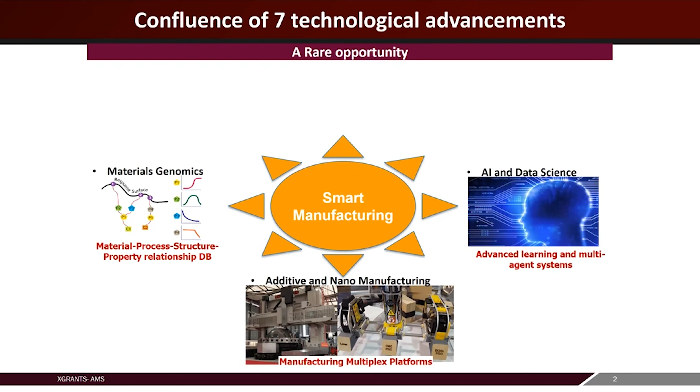All these things happen through advancements in what people in the general public call AI, and we refer to as data science, looking at advanced learning technologies as well as emerging into what we call prescriptive analytics. In addition, there have been significant advances in measurement technologies, both in terms of sensors and communications, and also advances in computing—advanced cloud, edge, and other architectures—as well as the use of clean energy to make manufacturing not only efficient and productive, but also sustainable.

So this is a rare opportunity where all these advancements we are seeing in various different fields can be brought in to advance the way we make things. That's pretty much how I see smart manufacturing.

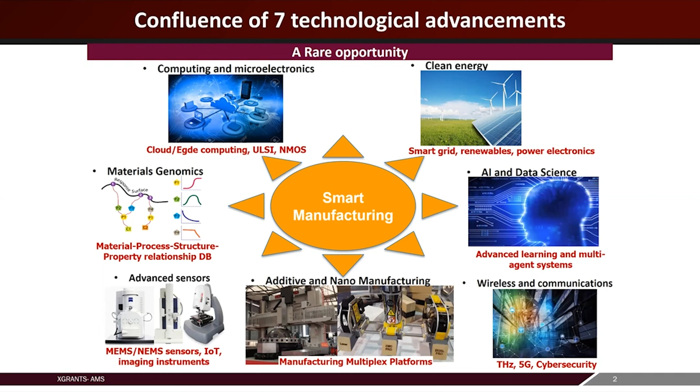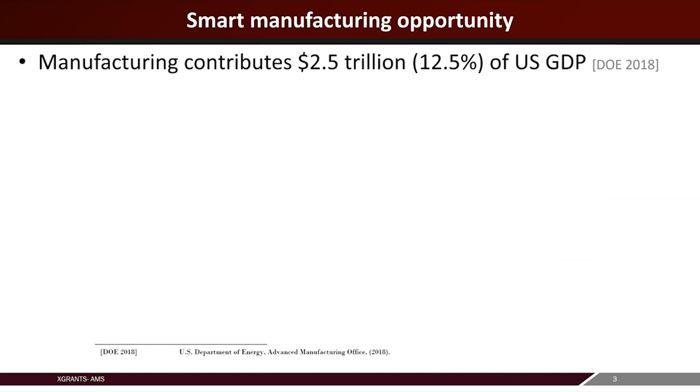But in this context, there are some important points I would like to lay out to our group. The first is it's extremely important to look into this, and I hope this presentation helps us look into this problem in much more depth, and raises interest in this problem among our community. It contributes a significant portion of our US GDP, and lots of these industrial groups are becoming part of the smart manufacturing effort.

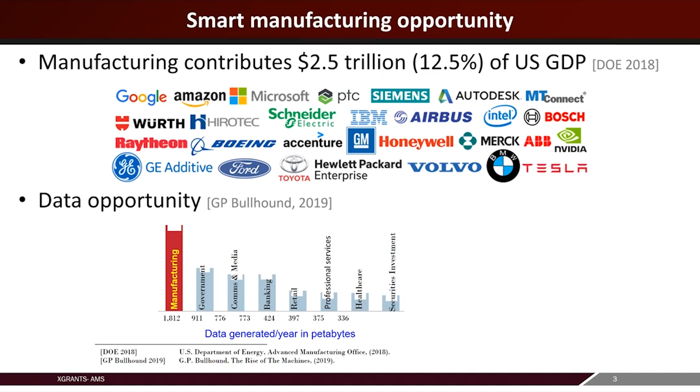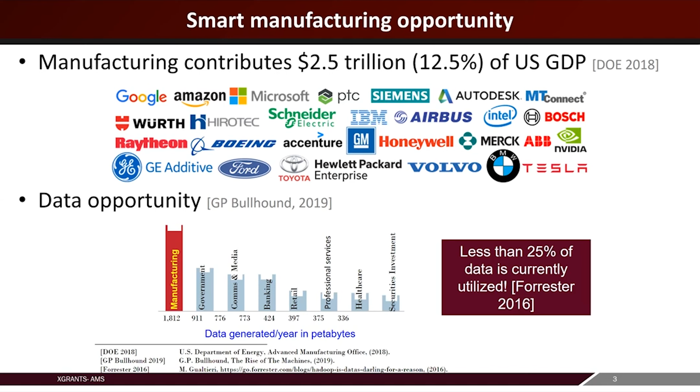Second, and more important, from a data science standpoint, the amount of data generated in manufacturing exceeds the data generated in any other field. So if someone wants to study data science approaches, manufacturing would be a very fertile field. There are certain interesting challenges in that very little of the data generated in this manufacturing industry is currently utilized. So there is an opportunity to harness this information in many different ways.

These include the way we actually design and make smart products. What I have put on the screen are three different emerging products. The first is morphing wings on aircraft. This is not a dream anymore. In fact, using shape memory alloys, we can create some of the materials needed to create this morphing behavior.

Second is a 3D printed house. We can create kinds of houses with shapes we cannot possibly even imagine. Some of the advances in the seven things we outlined in the previous slide probably can come in handy as we develop these technologies. The third picture is more at the consumer level.

We can create a multi-material 3D printed single integral part. Essentially we get tested, and the multi-material component gets printed for us at the point of use. This is an interesting possibility that is emerging. Alongside, we are looking at not just designing a component to meet dimensional accuracy, but also to meet the material and microstructure, so we can control the product not just to dimensional tolerances and surface morphology, but also the materials and microstructure.

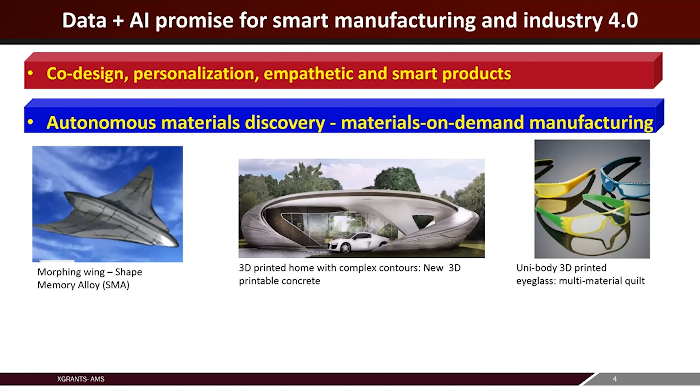These are some emerging ideas that the manufacturing community is looking at, where data science can enhance some of these thrusts. The third is something that the QSR community has looked into for a long time: can we use data science methods with manufacturing process data to self-correct faults, improve asset management, as well as optimize machine parameters to avoid and overcome quality issues.

And people are talking about moving from flexibility to automation to autonomy, so we can create what are called lights-off factories that are much safer and much more reliable than the factories of today. More than in the US, European as well as some Asian countries are working in a big way on this thrust of creating lights-off factories.

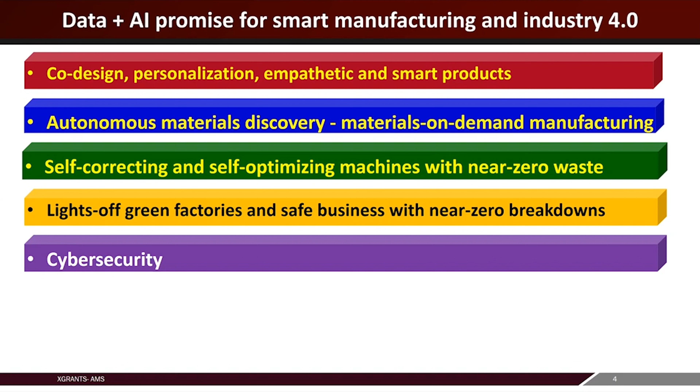Another item that is emerging is cybersecurity. We can use advances in data science to address security vulnerabilities in manufacturing systems. In all these applications, if you look in depth, the foundations are essentially a combination of physical science - manufacturing science - and data science. How can we bring these knowledge components together to address some of these exciting emerging challenges? That, in essence, is the theme emerging from a data science standpoint for smart manufacturing.

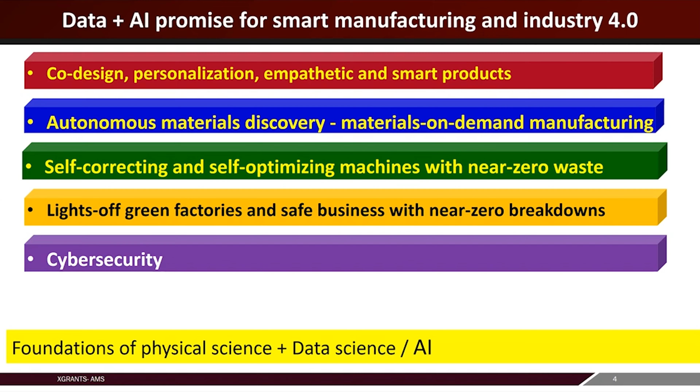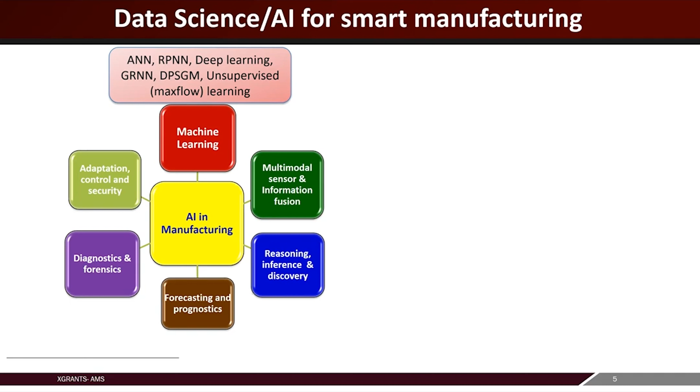When we look at what has been done on data science and AI for smart manufacturing, the first thing that comes to mind is machine learning. There has been a lot of work that our community as well as the manufacturing community has looked at in applying and developing new machine learning techniques to address manufacturing challenges. In essence, what we are trying to do is identify the function that maps certain inputs to certain outputs - that's pretty much what all these deep learning methods do. There has been, in my view, a proliferation of approaches from our community and beyond to address manufacturing related challenges through advancements in machine learning and AI methods.

But that is just one component of where data science can help.

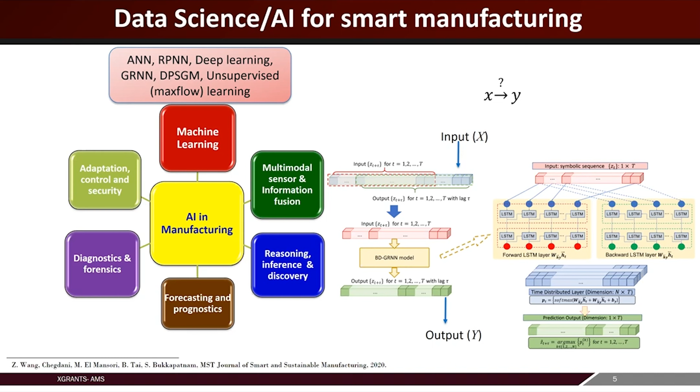There are other techniques needed to fuse information that comes from different kinds of sensors and data sources. One of the key challenges is how we can represent real world information in a form that is tractable for learning and other applications. That is the first challenge from a representation standpoint.

Our community has developed different kinds of methods, especially dimensionality reduction techniques, using optimal wavelets to properly capture and extract features. Graph theoretic approaches have also been done.

Just to lay out a few quick examples from our own experience, what you're seeing here on the screen is a micrograph of a 3D printed surface in as-printed form. We can actually come up with a graph representation of this that can be used to characterize the surface evolution during the post-processing processes employed for finishing these 3D printed components.

You can also keep it simpler. Instead of looking at complex scenarios, you can be looking at time series data. The challenge there is how we can compress this information or reduce the dimensionality so that enriched features can be used for making inferences about the process.

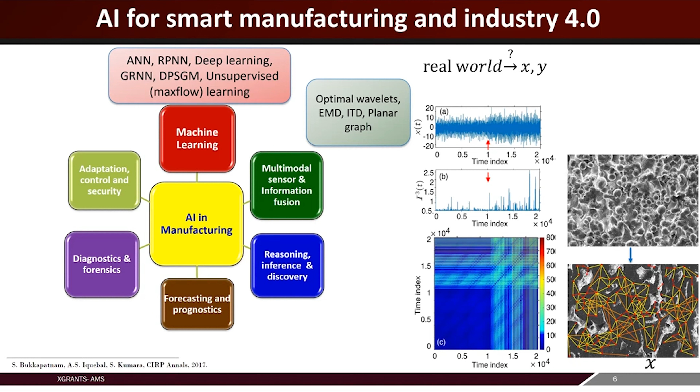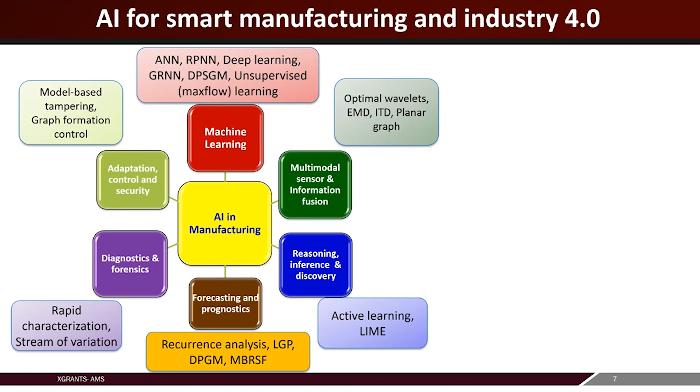Methods have been used for reasoning, using active learning and sequential experimentation techniques. Our community has also looked at forecasting as well as prognostic approaches for manufacturing. Of course, we have at least 30 years of work, especially as a QSR community, in diagnostics and forensics. Recently, there has been a significant thrust in looking at control, security, and adaptation through advanced AI and data science approaches. These are just some facets of what our community has looked at.

Let me talk about what I have been doing in this context. My group has been looking at combining knowledge about manufacturing processes to address quality and productivity issues in both manufacturing processes and systems, especially through the use of data science and AI approaches.

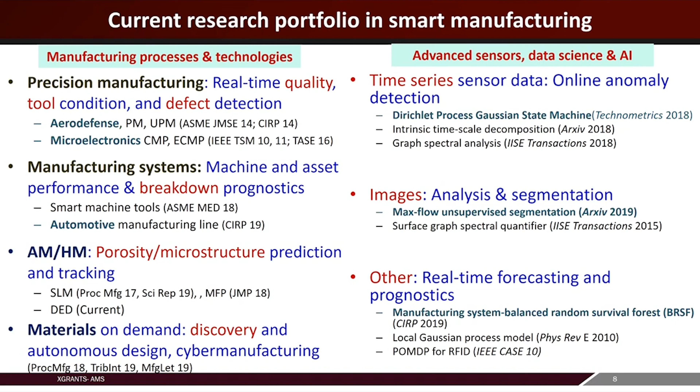In terms of manufacturing domains, we have looked mostly at precision manufacturing and, recently, additive manufacturing as well as material synthesis. In terms of methods, our group has looked at different kinds of time series data, especially combining multi-channel and multimodal data, and more recently images as well as other forms of data, essentially from industrial data loggers. In this talk, I will restrict my presentation to address three different challenges.

The first challenge is encountered at the manufacturing systems level. The second is at what we call the product level, and the third is at the process level. So: system, product, and process.

Thinking about the industrial sectors where each of these problems arises: the first is mostly in high volume automotive manufacturing. The second is mostly in a custom manufacturing environment, where you are creating a very high value product but don't have lots of components to learn from. The third is what we call high-tech industry, essentially dealing with components that demand very high levels of precision and functionality, whether high or low volume.

These are the three different industrial sectors and three different scales from which we can look at this. In the first case, prognostics and asset management in the manufacturing system, I'll present a challenge involving how to fuse information collected across the plant to improve reliability of the entire system. In the second case, I'll look at how we can detect defects in a custom manufacturing environment where you don't have full information about what kind of defects occur a priori. In the third scenario, I'll look at detecting changes at very incipient stages, so we can avoid quality problems, even minute-level ones, that occur in high-tech industry.

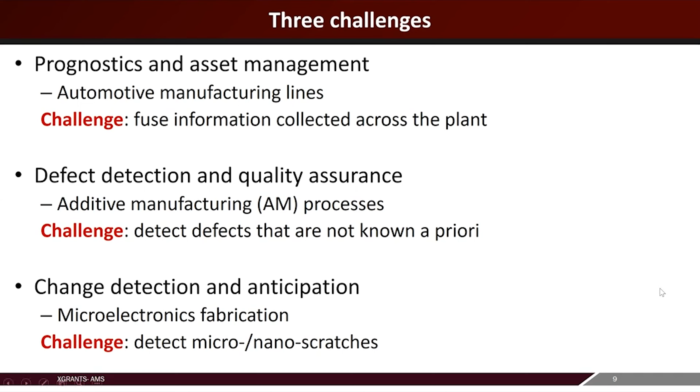To give a quick start, I will talk about the first problem. Many of us have worked in automobile assembly, but to set the stage for describing the problem, I will run the following video. I'll skip some parts so everybody can see this. I hope you can see the video and hear the sound.

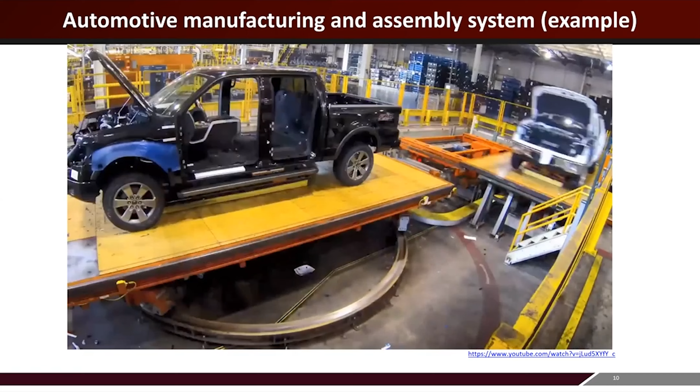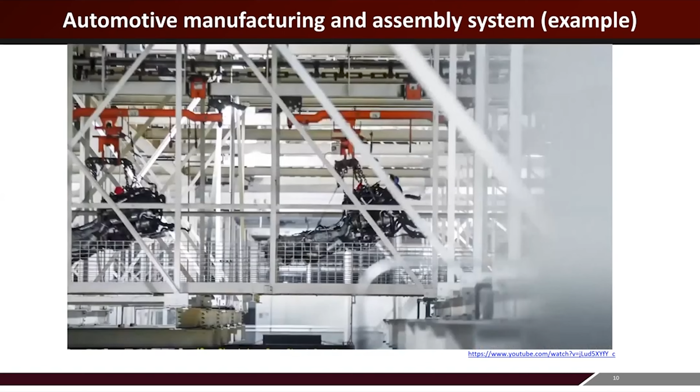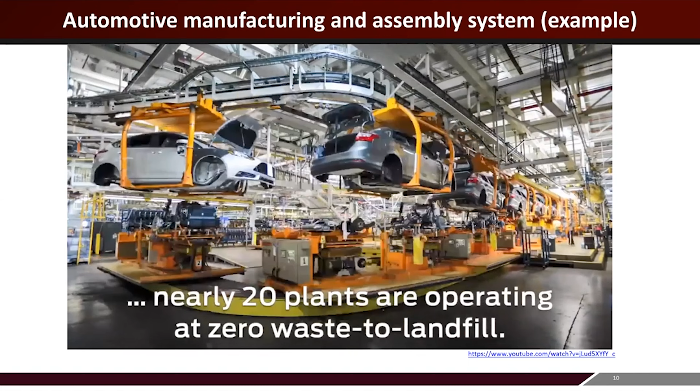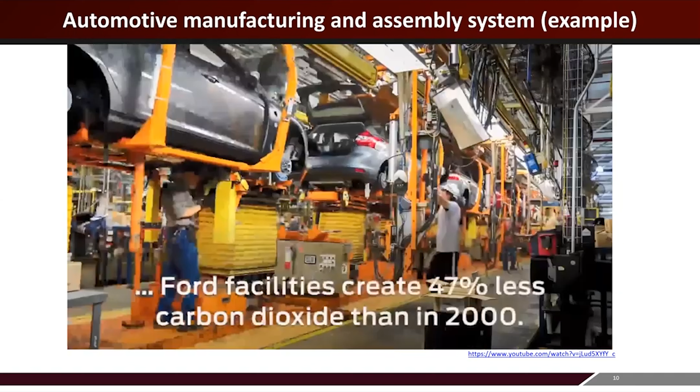As you can see here, when you assemble, you're assembling several components every hour, and the assembly takes place over multiple stations. The material moves between stations through different means. Typically in an automotive assembly line, you have what is called the main general assembly, and there are a lot of sub-assemblies that make the complete product we actually see. Each sub-assembly can be thought of as a very diverse manufacturing system. Some sub-assemblies are highly manual and some others are completely automated. Each sub-assembly has about 10 to 12 stations, which can be in sequence or non-sequence, as you can see here. They may be linear or non-linear.

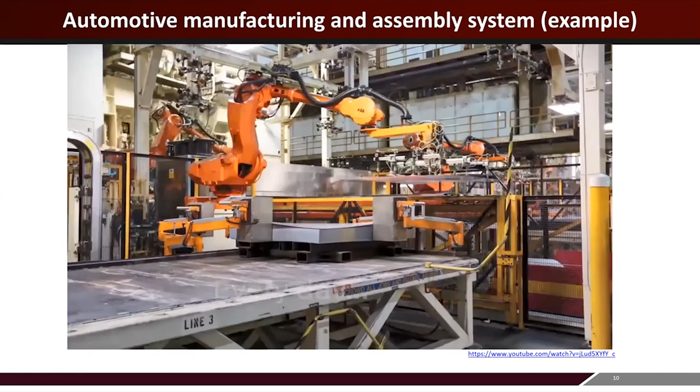So essentially, in terms of simple queuing, this actually presents some interesting challenges. You can have re-entry and so on that people need to deal with.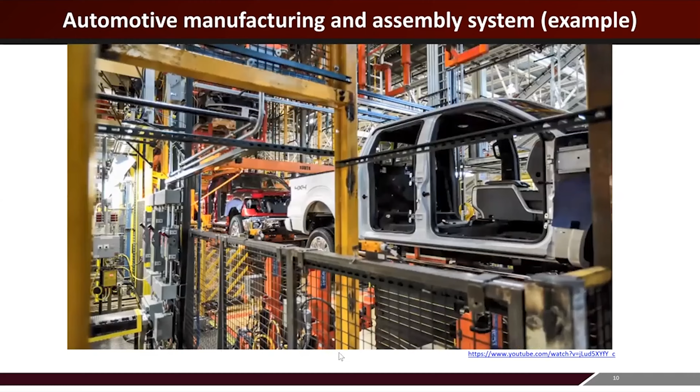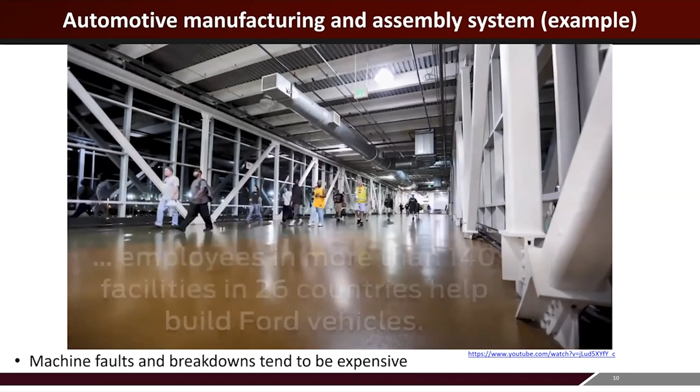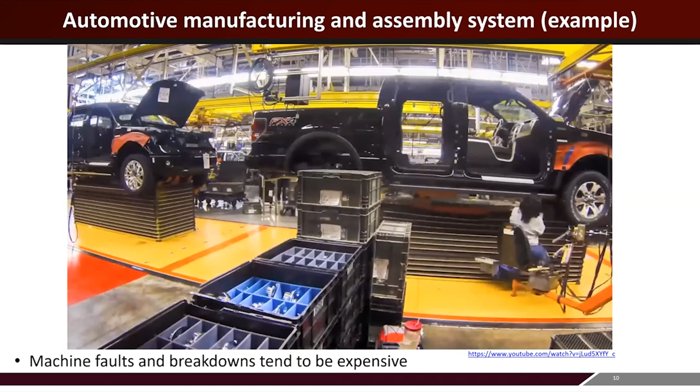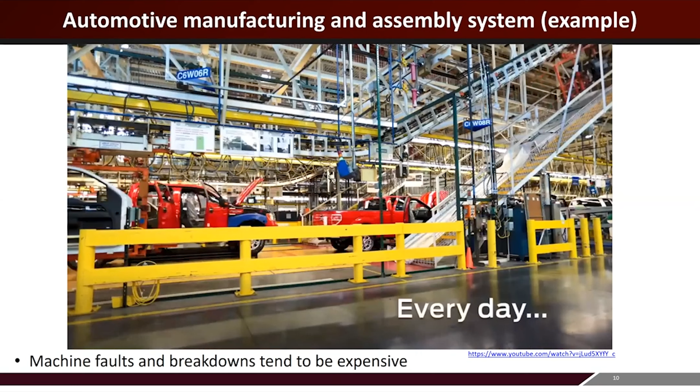So in all this, the major challenge here is that when something fails, it can have significantly more influence than what that particular station affects by itself. Let me repeat: a simple fault in a particular machine has much more serious consequences in terms of affecting the productivity across the entire plant. This is a major challenge for the automotive industry. How can we make sure we address these issues of machine breakdowns?

To address this, there have been a lot of thrusts. In the last 10 years, there has been a lot of effort to deploy what are called plant floor information systems, or PFS, for automation and control, using the data from this PFS for improving the availability as well as overall efficiency of your entire plant. These plant floor information systems are growing very steadily across the world. The market is growing at a very healthy rate, and it is expected to reach 300 billion plus in the next 4 to 5 years.

The typical examples of plant floor systems include all these PLC controllers, SCADA systems, and DAQ systems, and you find a lot of them in the plant. If you go to any automotive assembly system or most automated manufacturing systems, you see this PFS system in some form or the other.

Alongside, there has been significant introduction of these manufacturing execution systems, or MES technologies, and they are growing at 20%. They are not necessarily at the same level in terms of market penetration as PFS, but MES systems are growing very, very fast, and they also provide some additional data.

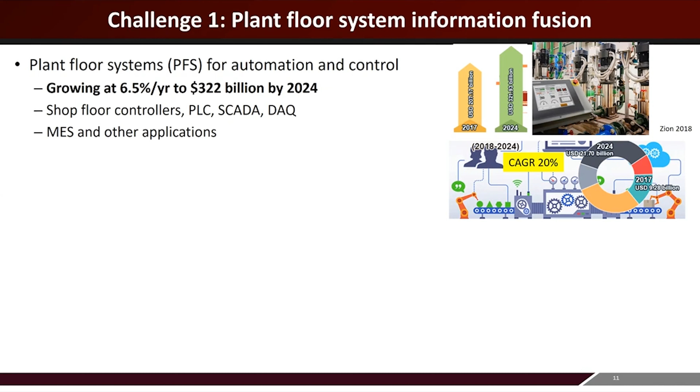Not the least, these embedded sensors and IoT are starting to make serious growth in the manufacturing industry. They're growing at over 40%, a rate that exceeds that of MES as well as PFS systems. But their level is nowhere near that of PFS. These are something we need to be aware of, and then develop methods that can take advantage of all these diverse data sources, especially the amount of data they generate of different kinds from different sources.

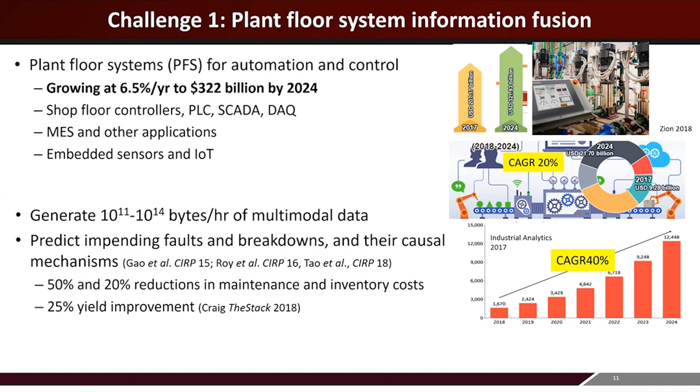If they are used well, they can be used to predict faults before they occur, so we can prevent them. We can also learn from the modes in which they fail, so that we can address the failure before it even happens. We are not just preventing them, but actually redesigning or readjusting the system so that some of these modes get completely trapped. There have been studies that showed we can reduce the maintenance and inventory cost by 50 and 20% if we can predict the impending faults, and we can actually improve the yield by doing so.

But the challenge remains much more than what we have been able to provide in terms of solutions, especially in the manufacturing community, especially when we are looking at completely interconnected manufacturing systems. People are talking about distributing various manufacturing tasks across the entire enterprise, so they are not significantly different from some of these smart grids. If a failure or fault occurs at a particular point, it can literally black out the entire system. That is basically the gravity of the challenge.

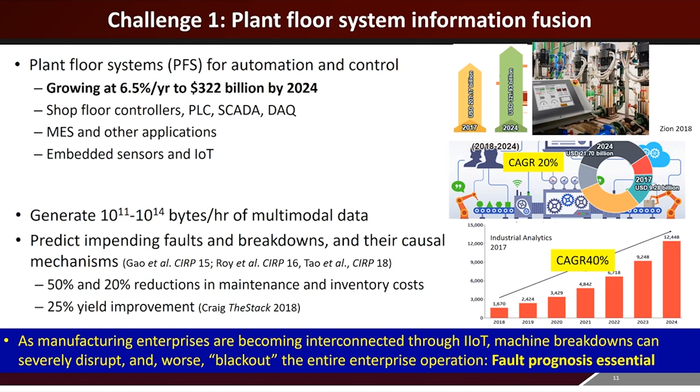It's actually a sub-assembly. It has some manufacturing machines through which the part goes, and it produces about 120 components an hour. Not the full cars, but 120 components every hour, and in a shift you have a few thousand components produced.

So if there is a failure, it will have serious ramifications on the entire production plant and even beyond. The approach we've taken is called manufacturing system-wide balanced random survival forest, or MBRSF. It's similar to many survival models used to predict failures, except we took advantage of recent developments in non-parametric methods, using knowledge of how these different machines and processes are connected to develop the state space for training these models and predicting faults.

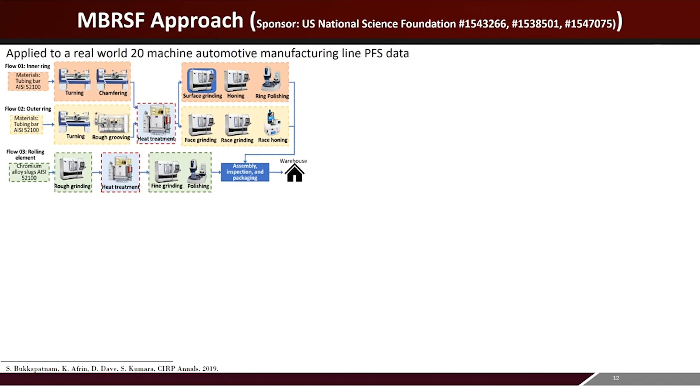More than the method, the results are much more revealing. What we see in this graph is a comparison of the prediction errors for predicting faults using the method we developed versus some standard methods. The Kaplan-Meier is considered the baseline, along with the Cox proportionality hazard method, as well as general random survival forest methods.

As we see here, even for about half an hour, the errors for predicting faults remain very flat. What this means is we can design methods using just the plant floor information system data to predict a fault at very good accuracies, almost half an hour ahead. So this can be extremely helpful.

To our knowledge, the data science community has not begun to harness this information for life prediction applications, and I think this is something we can look at and improve even further, especially in terms of predicting for even longer time horizons.

So what we tried to do is ask: can we predict faults up to a shift ahead, and what kind of prediction accuracies do we get? As you can see here, the integrated Brier score, or IBS, is kind of a surrogate for prediction errors, and it shoots up as we go beyond half an hour.

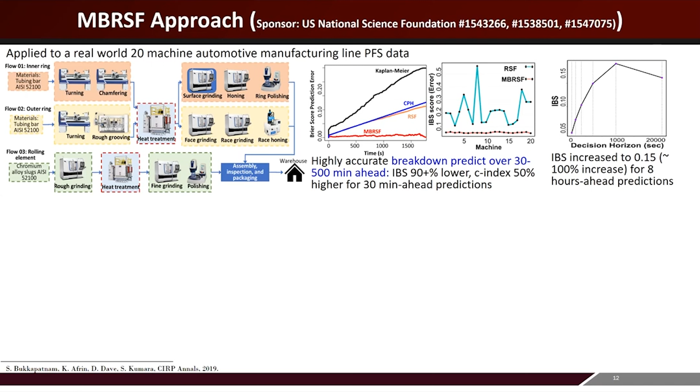The other idea we had when working with the data, especially with our sponsors, is that people develop these prognostic methods, but industry cannot use them because they don't know how accurate they are in actually predicting an impending fault. If you look at most of these survival models, what they predict is basically the probability distribution of your hazard, specifically what they call the hazard function. How can we use that for predicting actual faults?

We developed a visual technique. These are some of the things that we as a community can do beyond providing these predictions, and we can also come up with graph-based methods to infer the results.

It's not just okay to say that there's a good chance machine 10 will fail in the next half an hour, but also we can probably tell why. So before we get into the physics, even with historical failure patterns, we can say that the failure of machine 8 will have an implication on how machine 11 will fail, and so on. I won't get into the details of the color coding, but we can look at the so-called causal mechanism that takes place for the failures of these machines, especially by analyzing the data, purely the historical failure data from the machines.

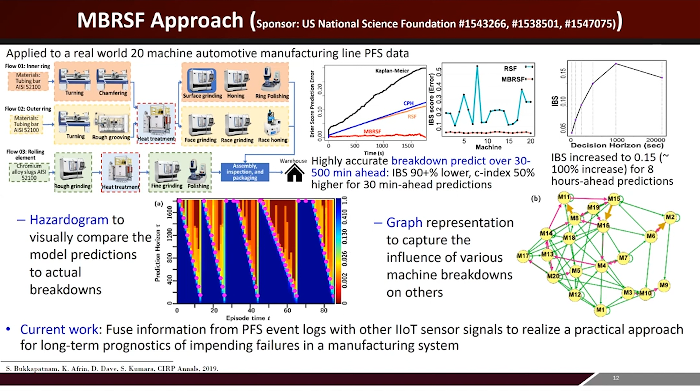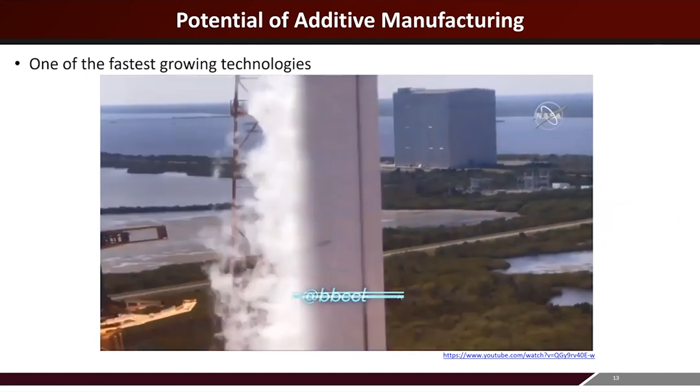This is one problem that I would like to present to our group. The second is more at the custom manufacturing level, and people talk about 3D printing. What I want to do is talk about the potential of 3D printing, and of course this is a very fast growing technology. I would like everyone to spend some time listening to this if you have not done so.

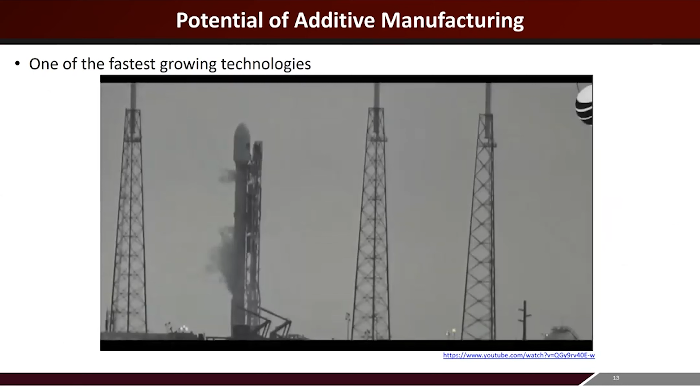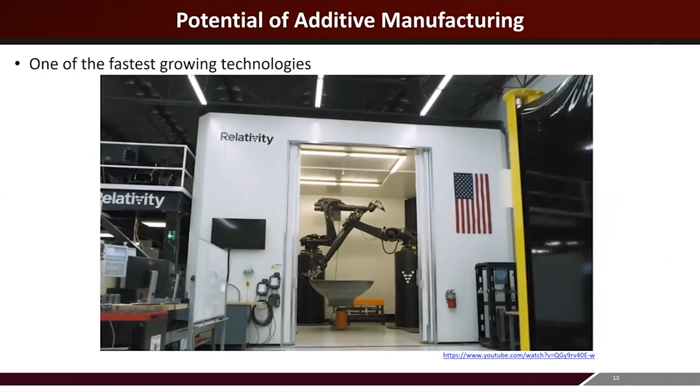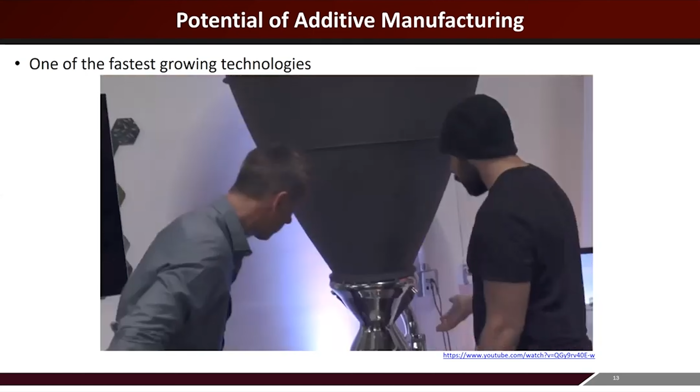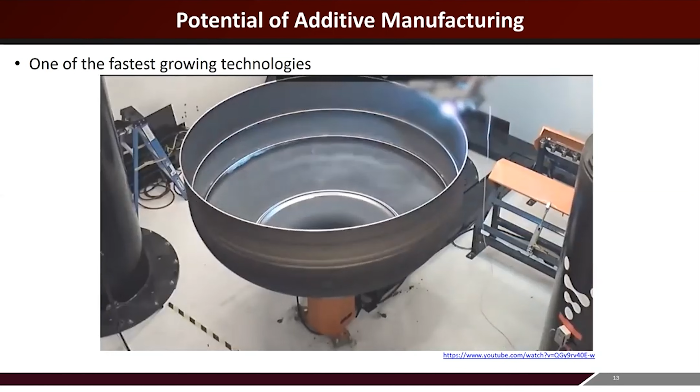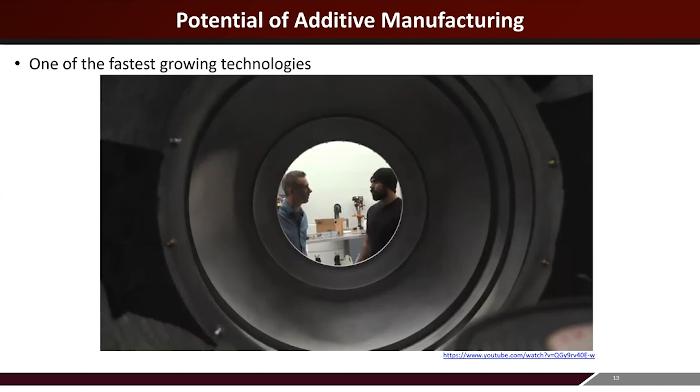This is Relativity Space. Existing rocket bits are not 3D printed. What is the advantage of 3D printing? A lot of it, from our perspective, is flexibility. Traditional factories are made of tons of fixed tooling—very expensive, very hard to change—where you have to retool a factory in order to make a new product or even change the product slightly.

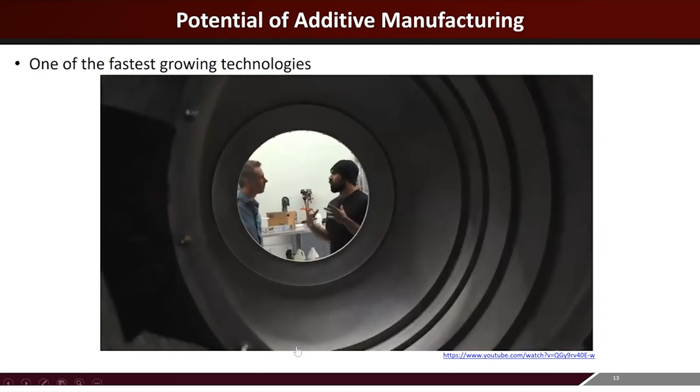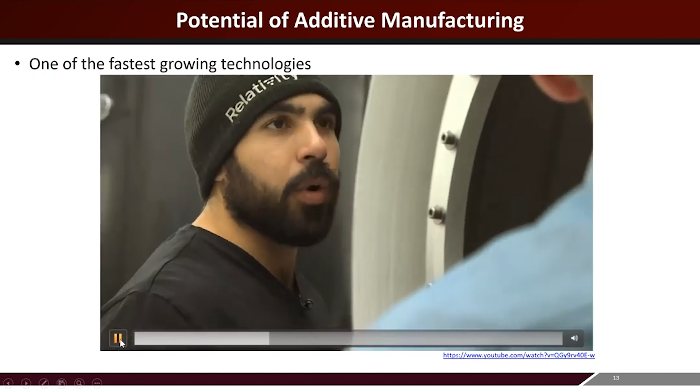For us, we can change all of that in software. So it's digitizing the manufacturing process and providing that flexibility, where if you push new code to the printers and the hardware on the factory floor, you can actually make an entirely different product without changing anything in hardware. Essentially, the idea here is we can 3D print some of the high-end one-off components, which are highly valuable, and as you can imagine, we need to get them right. Any quality issues can have serious ramifications, not just in terms of productivity and the bottom line, but also very serious safety and other issues.

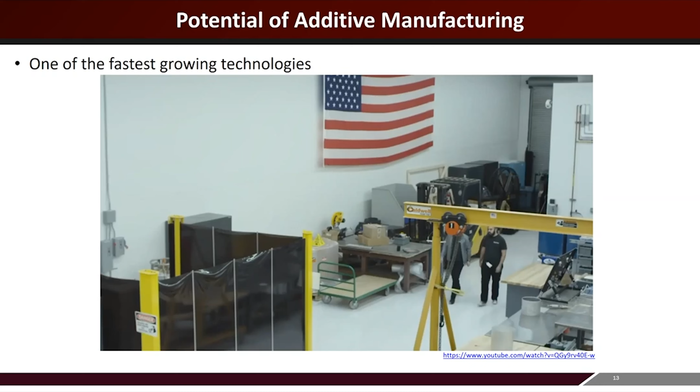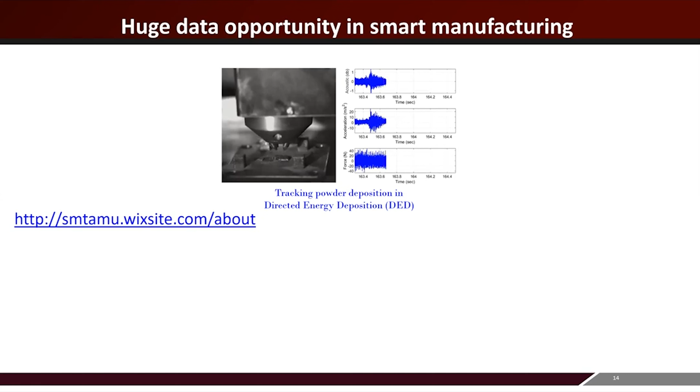We created what we call a smart manufacturing platform, or smart hybrid manufacturing platform, where we can collect different kinds of data during different stages of making these kinds of products and use the data for quality monitoring. In fact, while the process is running, we can collect vibrations of the machine, the forces these powders exert on the surface as they are being deposited, and the acoustic emission that gets released, and together they can be used to predict the actual microstructures using advanced methods we have in hand.

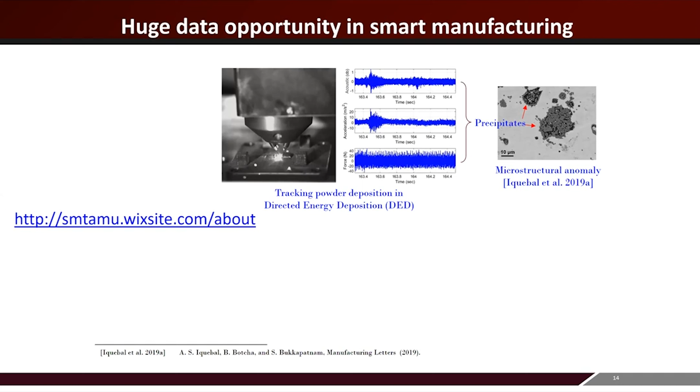If there are any kind of microstructure anomalies, such as those that result from excessive heating at a particular point, or differential cooling rates and so on, we can actually track them and detect them in situ. We can also study the process faults. As the material is getting deposited, we can track how the particles are growing.

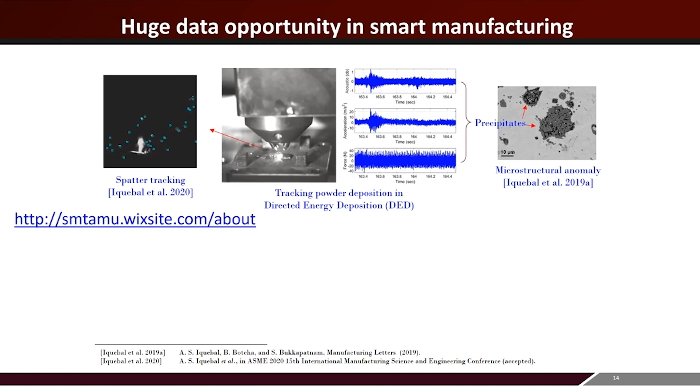One of the key challenges, especially for those who may have looked at welding, which is very similar to this process, is the challenge called spatter. When the spatter occurs, it creates a lot of these quality issues. There have been many ways in which we can reduce it, but if you're creating one-off components, it's hard to learn the process recipe that will minimize this spatter. So how do we develop methods on the fly? There are lots of interesting opportunities to address quality challenges in these processes.

How can we master this process? How can we optimize the process with minimum experimentation? And then how do you reduce defects as well as increase the throughput?

So there are interesting challenges in the smart manufacturing area too. And what I will talk about is how do you use images from these types of high-speed cameras, as well as in situ imaging systems that are becoming more prevalent in lab settings, and being considered for niche industrial applications.

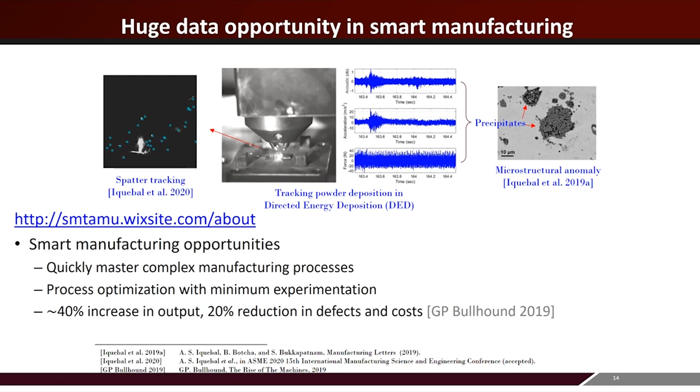The challenge here is how can we use the data these instruments provide for addressing quality challenges. And these quality challenges are extremely important in the additive manufacturing domain I'm laying out here.

Defect concentration remains a major challenge. This is because in many cases, especially if you're introducing new materials or trying to create a new variant of a product, it's a challenge to create a repeatable print with reliable quality. Too many anomalies, and then effects are very confounding.

More importantly, we don't understand the physics of this process in its entirety, and therefore people are seeing new anomalies all the time. In the materials parlance, people are looking at autonomous materials discovery. Whether they're discovering new material or not, people are actually discovering new kinds of defects in the products.

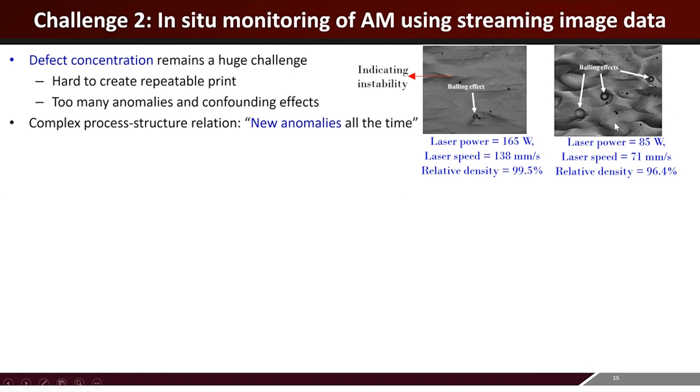What you're seeing on the right-hand side are two different kinds of defects. One is balling effect, and here and there you have pores on the surface. How can we detect and track them using some of these in situ as well as ex situ instruments? That actually is an interesting challenge.

But we need to deal with some of the problems you face with these in situ instruments. They're not in ideal locations for taking measurements, so they contain lots of noise and significant uncertainties, because you cannot always go back to the same location with very high precision. More importantly, you don't have many products - you cannot do lots of experiments to see these defects and minimize them.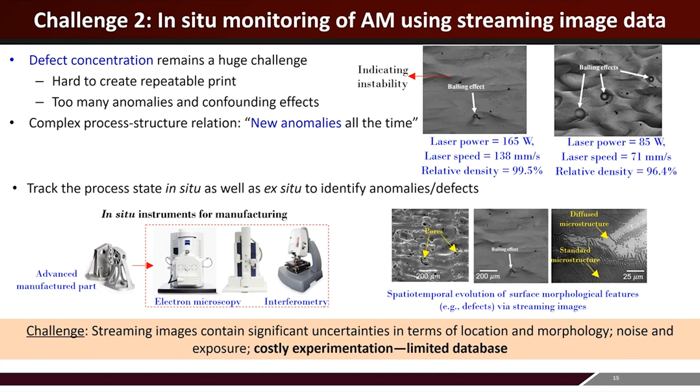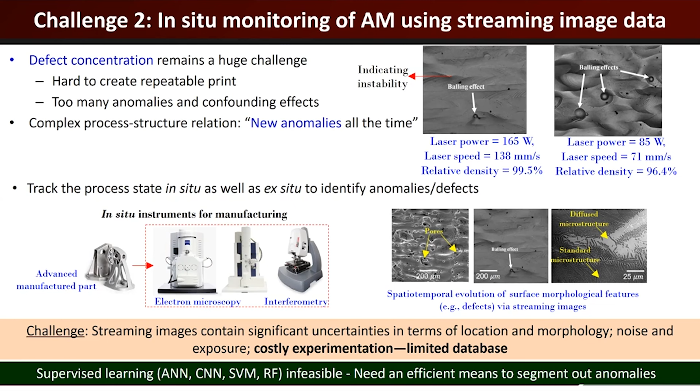So we need a better way to learn these defects and identify them compared to using brute force deep learning as well as other supervised learning approaches. Alternatives, as our group sees it, are looking at unsupervised or active learning approaches.

Just to give a quick overview, if you look at most conventional machine learning, it is passive. Essentially you're showing millions of images - it's equivalent to seeing a photograph of a speed sign, and then making the computer learn to detect the speed limits in a particular segment of a street.

Essentially you can show millions of photographs in different ways, and based on that, have the computer learn about the speed limit so you can adjust speed while moving an autonomous car. But for manufacturing and other applications, obtaining each photograph is equivalent to performing one experiment, and most of these experiments tend to be extremely expensive.

One way to do it is to cleverly choose the experiments so you can actively seek to learn where to run the next experiment based on what you've seen previously. This belongs to the idea of active learning - you are running experiments, and based on the experiments, you're learning and determining where the next setting needs to be.

It's part of the sequential experimentation strategy our community has been working on for several decades, and we have some of the doyens of this field amongst us. By doing so, it can help reduce the number of iterations, explore new regions of the input space, and deal with some of the surprising outcomes that can emerge in these contexts.

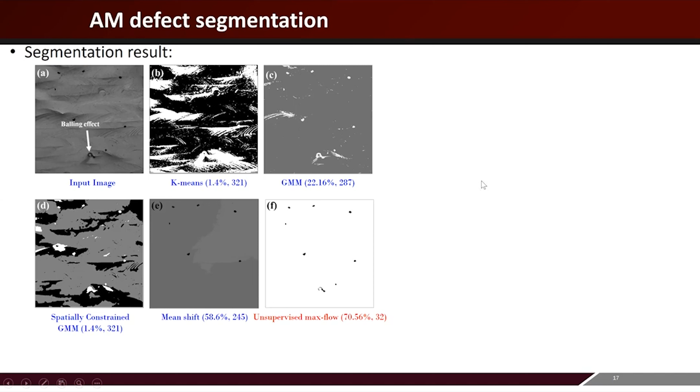In terms of identifying defects in additive manufacturing and other scenarios. Such methods can be used not just for detecting defects, but also to track their evolution under different conditions of the process. We can develop techniques to perform real-time monitoring of these defects based on fast-moving high-speed camera images, as well as other in situ measurement systems.

The idea is, can we generate through our experiments more labels by which we can more accurately predict some of the defects as they occur in these additive manufacturing scenarios. So that is one other challenge that may be interesting.

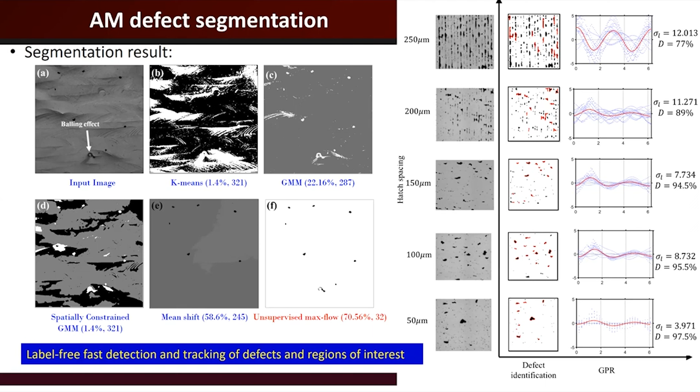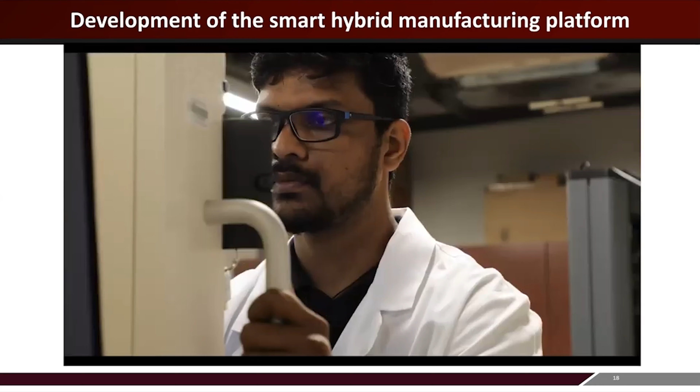In the remaining time, I'll try to quickly present one more challenge, which is at the process level: autonomous materials discovery. This is a challenge for current machinery, materials, and process research, and is an important step toward practical and fast material discovery.

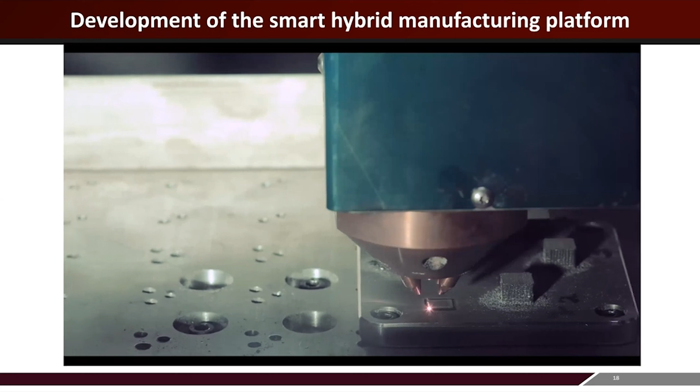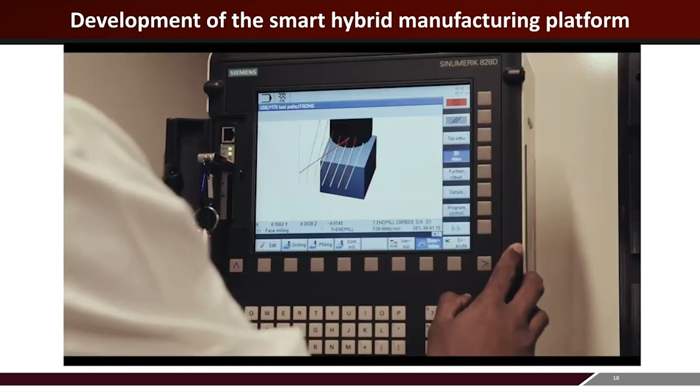The smart hybrid machine combines additive manufacturing and machining. It uses lasers, metal powders, and heat treatment to modify the structure and properties of the created materials while collecting data about the material.

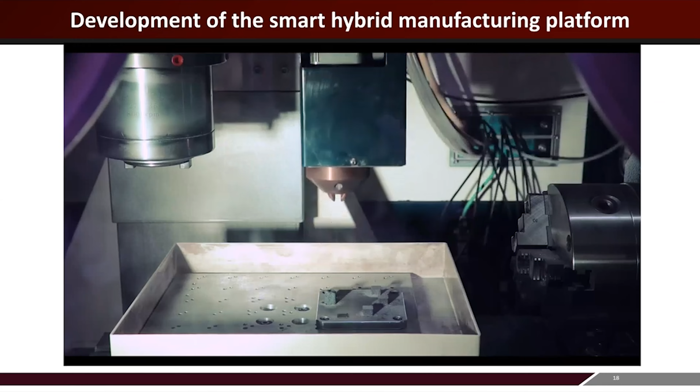This process can be automatically controlled using a computer. The computer uses code to create parts that can be simulated and verified by the machine before printing begins.

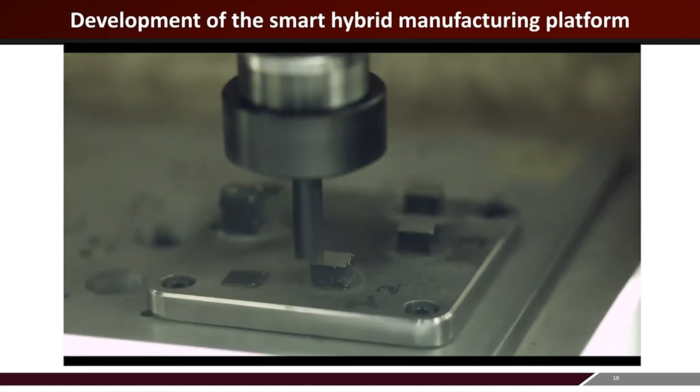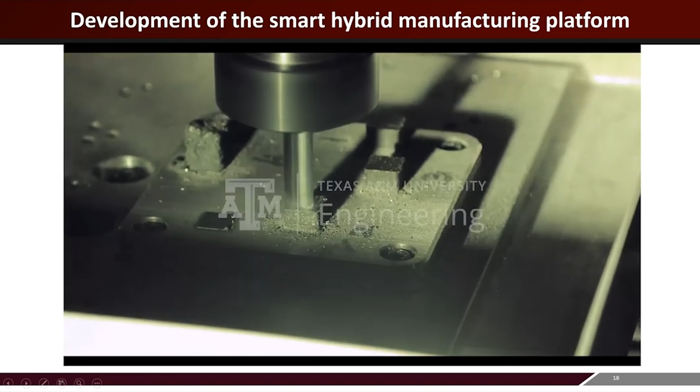The synchronous use of the high-speed camera and other instruments allows for faster data collection, which will speed up the discoveries of material properties. Around 1 gigabyte of data is generated every minute by the machine. This data, along with the discoveries from the machine...

Some of these smart machines are becoming more and more popular, and for high-tech industry this can be of extreme relevance, especially to detect anomalies in their very incipient stages.

What you see here is a CMP process, a chemical mechanical polishing process that many people from our community have worked on. Essentially, it's polishing very similar to the way you grind a surface, but at very high precisions. What you see here is one of the components that got polished to what we call specular levels, that is, optical finish.

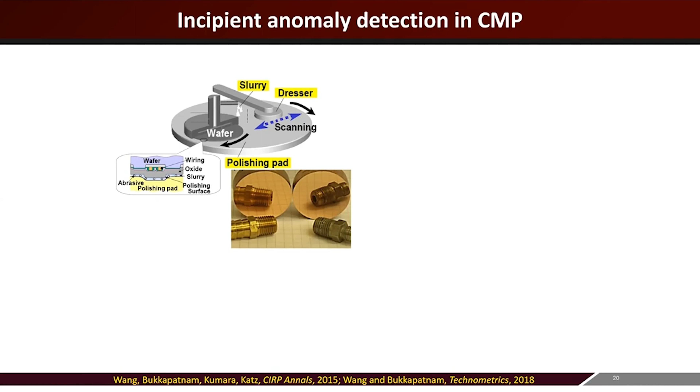To do that, the industry actually does a lot of in situ monitoring of the process integrity, because lots of things can go wrong in a high-tech environment. What you see here is a small version of this polisher, but it's equipped with a wireless vibration sensor, and what you see here on the screen is the data that got collected from this machine.

Part of the data was collected when the machine was producing good polish, and part of the data towards the end was collected when the machine was producing a bad part.

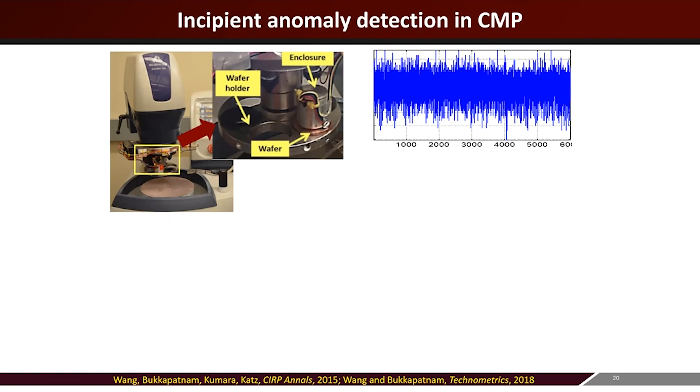Since it's the end of the talk, I'm going to ask a quick question: up to what time the signals were coming from the good process, and at what time the signal was coming from the bad process. Purely looking at the time series, it's hard to tell. But if you were to guess, you might say that something may have gone wrong at 4,000.

But in reality, things actually went wrong much earlier, near the 3,000 mark itself. Up to here, the product did not have any scratch. After the second half, when the polishing was happening, you're producing what we call micro scratches on the surface, and detecting them using simple techniques is not easy.

Several of the conventional as well as modern techniques cannot detect this change very easily. It takes several milliseconds to a few seconds before you can detect this fault. By the time it rolls over, a few seconds means you're actually creating the equivalent of a 1 meter long scratch, which means the entire wafer that you're producing needs to be scrapped.

So you need to be able to detect within a few milliseconds so that you can salvage or at least rework to avoid some of these failures occurring. Again, the problem with conventional techniques is the data that you get from these processes tends to be transient.

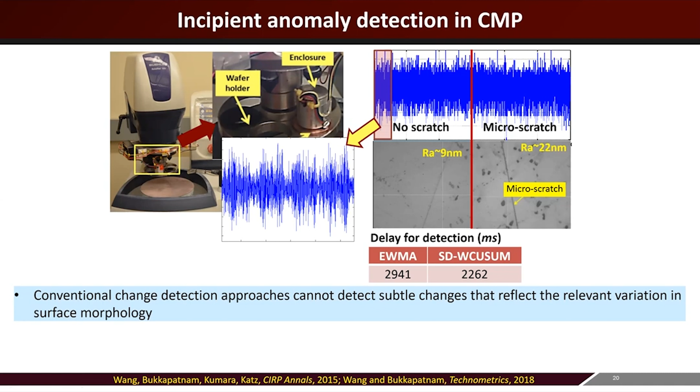You basically have variation of the signal patterns, where for some time signal amplitudes have a particular pattern, and for other times it has different time frequency patterns. So these varying patterns are hard to capture and then be able to detect.

There are some mixture of Gaussian type methods. There are many different methods that we can come up with to capture this transient characteristic of this data and improve the process prediction. And we can actually significantly improve on the times, basically in terms of ARL1, to detect some of these faults.

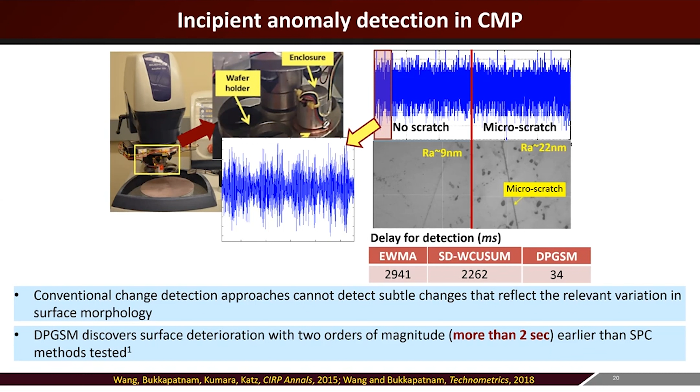Again, lots of interesting opportunities exist in dealing with some of these transients in the data sets. So with that note, I would like to summarize today's presentation. Essentially, we have been witnessing a lot of advances in quote-unquote AI, mostly data science, to address smart manufacturing for Industry 4.0. And people are really talking about AI for manufacturing in a big way across the world. And there are facets to data science just beyond machine learning that can be applied to smart manufacturing.

And I hope I was able to convey some glimpses of the challenges that we encounter at different levels, especially in 3 different contexts. So with that, I would like to thank QSR for giving me this opportunity to talk to you. And I hope some of the material has been helpful. And at this point, I will be glad to take your questions. Again, thank you so much.